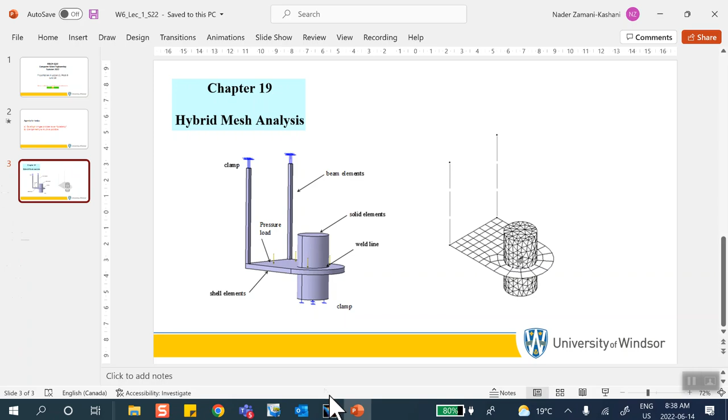What I'm going to do is make only half the model, okay? Single part, half the model. I'm assuming there are no questions. If there are, let me know, please. So I'll go ahead and part.

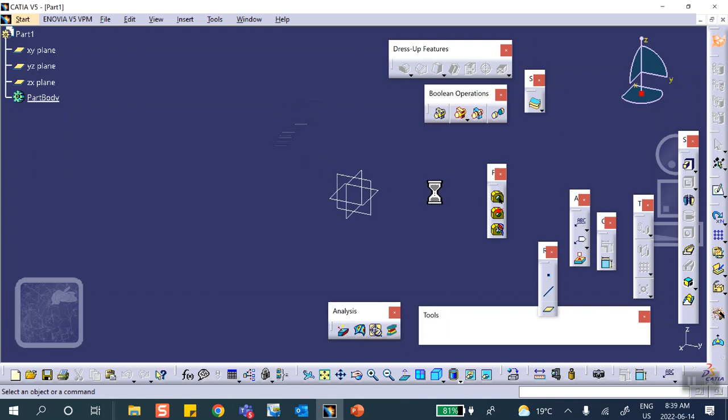I'll just draw half of that arc, okay? Half of that arc, because I'm going to pad half of the cylinder, okay? So let's do the part first, the cylinder first. So I'm going to go to part design. On that face, I will sketch. Not worry about dimensions, but just put something for one of them so that I have a rough idea of what sizes are.

Okay, so this is my half a cylinder, half a circle. Let me just put a dimension here so that — yeah, 2.5, okay, 2.5 inches, radius 2.5 inches.

Now I have to close this, because if you have an open profile like that, or this profile and another line next to it and a point on the same sketch, you won't be able to pad. If you have situations like that, you may want to turn the things you don't need into construction entities.

For example, if you made a point here, and then on this screen you made a point, you can do that here. See, point, line, and it's just hanging there. Then you won't be able to pad this, because it's an open profile. You have to turn those into construction entities.

An open profile can be padded by giving it a thickness, so basically it becomes a sheet metal type thing with a given thickness. If it's open, you can pad it, but not as a regular pad, you have to specify the thickness also. But I'll close it, that's not what I have.

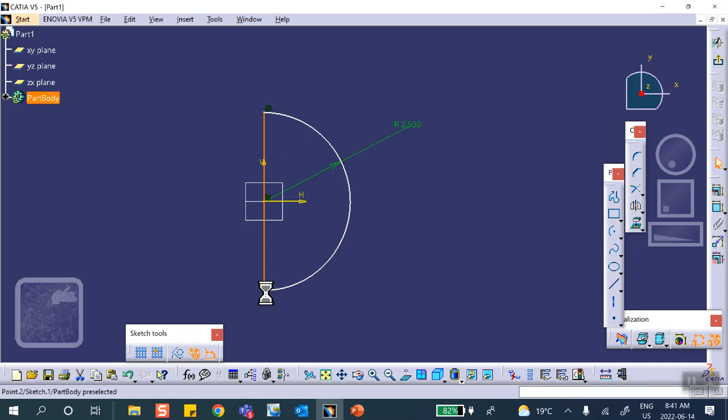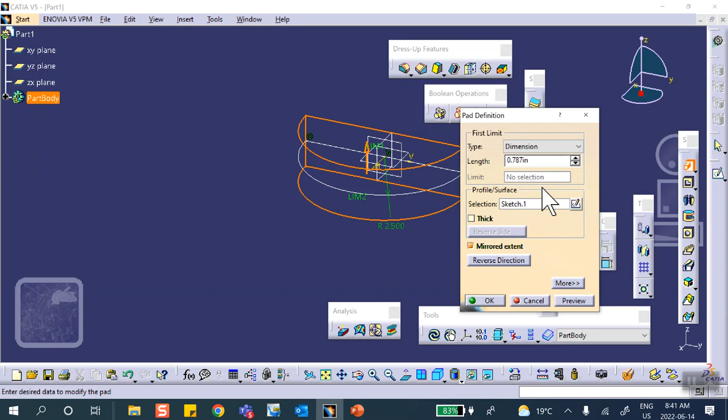All right, exit. Let's pad it by, maybe, 10 inches, 5 inches in each direction. Let's see how it looks. When I say thicken, this is an open profile, you can thicken it, but not this. Mirrored extent, okay.

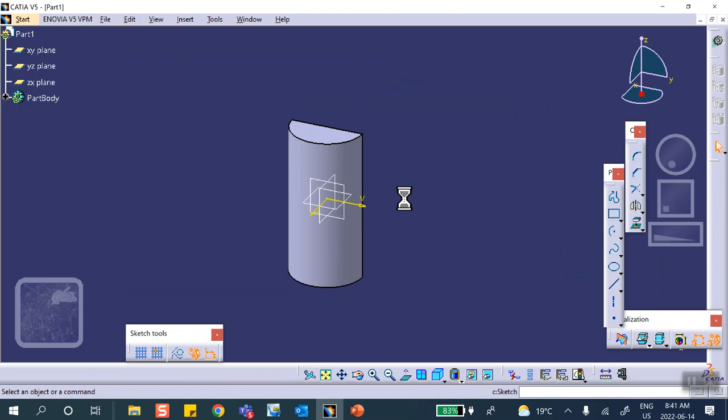So there we are. Then I'm going to create that sheet. Everything is in the same part, so on that same plane I will sketch. I have a choice of doing half of the sheet, which is what I'm going to do, or the whole sheet and then use a split later on to cut it. So something like this.

First, let me project this piece on that sketch. Project this piece on that sketch, because I want to make the rest of it.

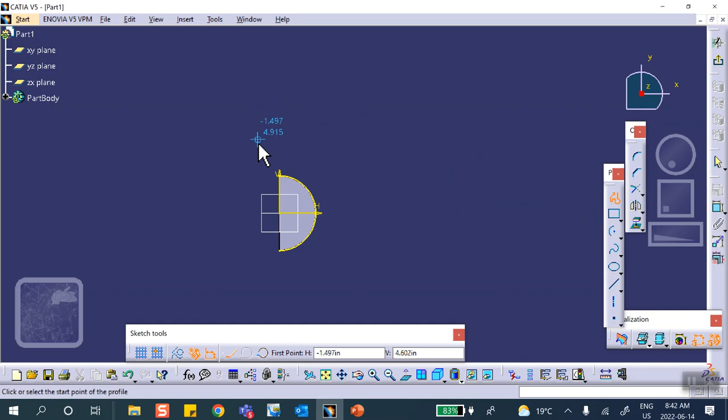Let's see now, the profile. We start here, go up, like that, like this, wrap it up, and if necessary, clean it up.

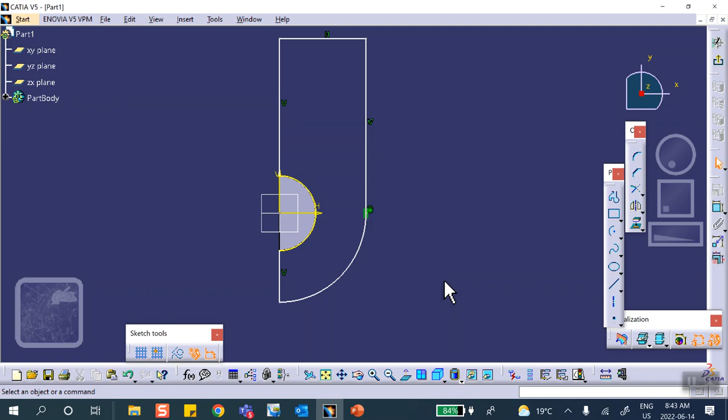If this is not closed, and I'm pretty sure it is closed, but if inadvertently I left a gap between two things, you won't be able to put a surface on it. But I'm pretty sure this is okay. If not, we come back and close it, clean it up.

So exit, and I want to put a surface through this closed path. As soon as you say surface, you have to be in generative shape design and look for fill. There's FILL. Hopefully this is closed, and there we are.

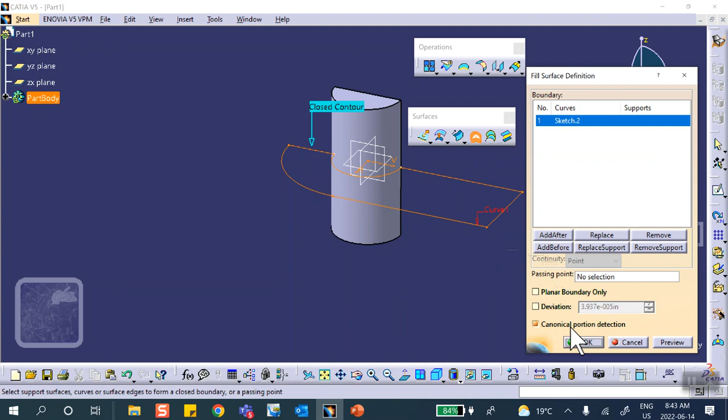And if I hide this, obviously, there it is. So undo that. Do not forget to save.

On Friday it happened, a guy came to me, that group came late anyways. He came to me and said, I didn't save anything. And his computer crashed.

Happens. I think he learned his lesson, but anyway, so file, save management, save as, desktop, new folder, call it 830 part. Parts, okay? A single part, that's what I mean. Say okay. And okay.

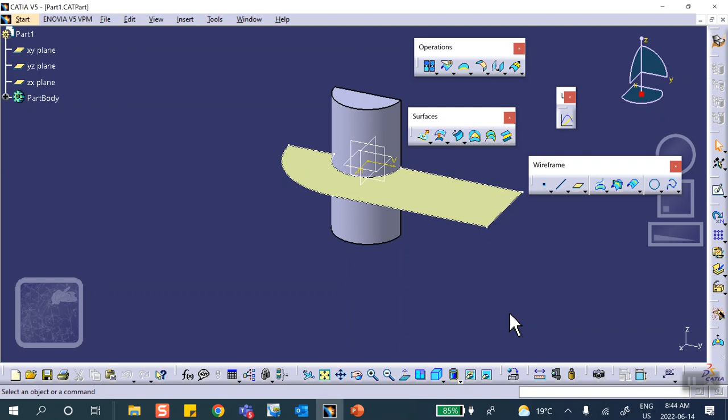Then we're going to do the line. So create a line on this plane in the direction, point and direction, okay? Point and direction, in the direction Z. Let's go by, maybe, 11 inches. See how it looks.

I think we have to change this to 0 also. Let me go up. Oh, there we are.

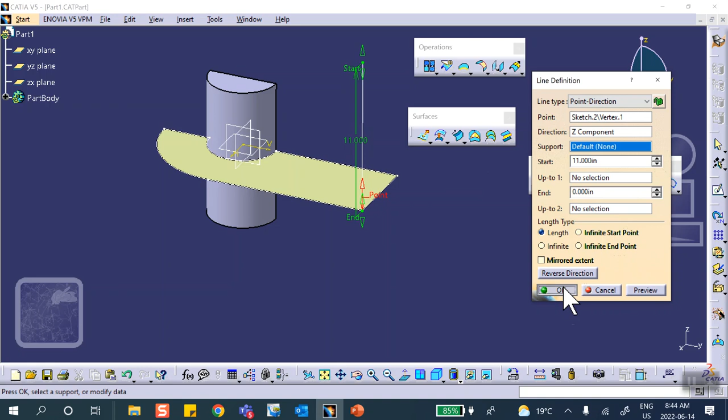Now, once again, it happened on Friday. Somebody said, I can't mesh this, I can't mesh this bar. And I asked them, did you sketch or did you draw a line? Obviously I drew a line here, but she said she sketched it. I asked, what do you have to do when you sketch things? She had no idea it had to be joined. When I told her, she said, really? So, yeah, really. Okay, there we are.

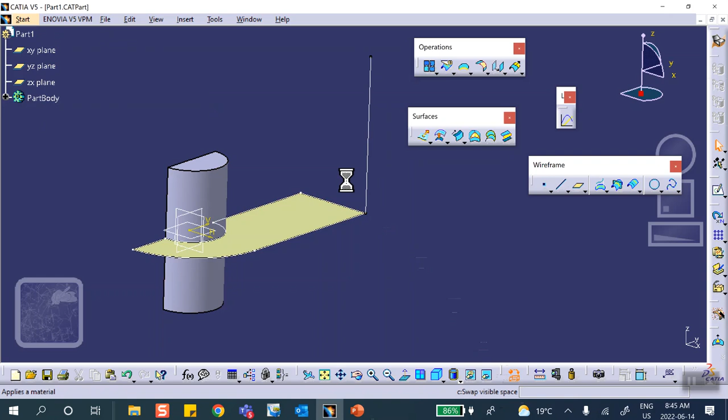And then we're going to save this. But let's put material, it's made of the same material, so aluminum, steel, aluminum, okay. And then save everything. We are good.

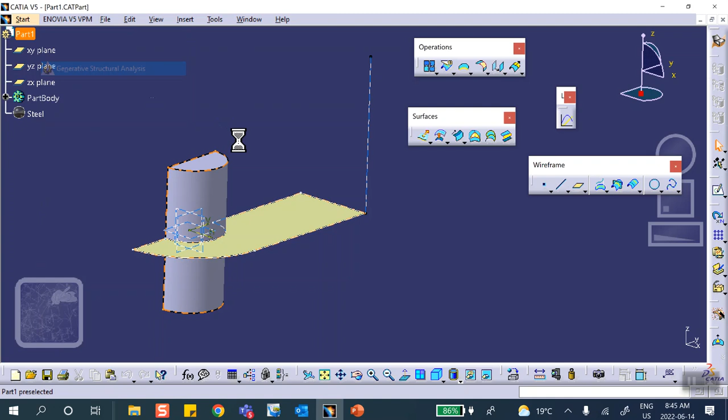Now, right, so now we're going to go to generative structural analysis. Catia immediately meshes that solid for you. And then I have to do the rest.

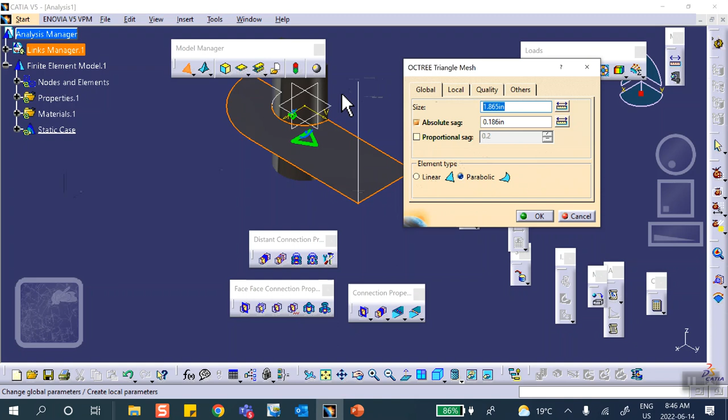Okay, so you go to shell mesh, we mesh this. I'll make it smaller, 0.5. Well, it's parabolic, that's fine. That takes care of this. You put a thickness on it.

It says 0.1, so I'll take 0.1. Then we're going to mesh this guy with beam elements.

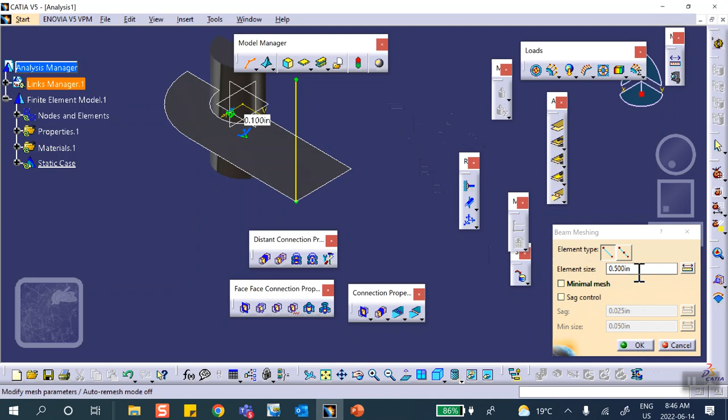Notice that we can mesh it. If this was a sketch, you'd have to join it first before doing this, otherwise you won't be able to mesh it. 0.5, okay, that's about maybe 6 or 7 elements through the length, no problem.

And then we specify the cross section. Let's do it. I think it was a rectangle there. So rectangle, because without it, if it's anything but a tube or a circle, you cannot close this. You cannot say okay. But rectangle, or if it's a circle, you can, but not otherwise.

How about making it 0.1, 0.1? It just happens to be like that. Obviously, I'm going to give you the information if needed.

Notice that I can't close it without using an orientation point. The orientation point cannot be on the curve itself or on its continuation. The reason is that you drop a perpendicular from the point to that line. If the point is on the line, a perpendicular to the line doesn't make sense. So I'm going to select this one.

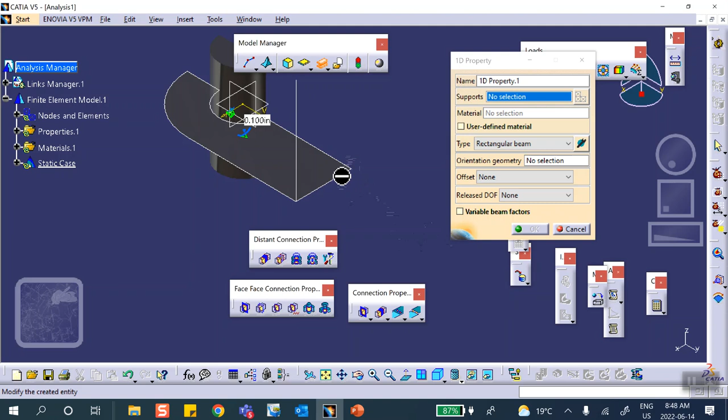Now, if I cannot select that corner, that's because this sketch is blocking my view. So I'm going to hide the sketch. And now, let me cancel that and try it again.

Okay, rectangle, not tubular, rectangle, 0.1, 0.1, 0.1.

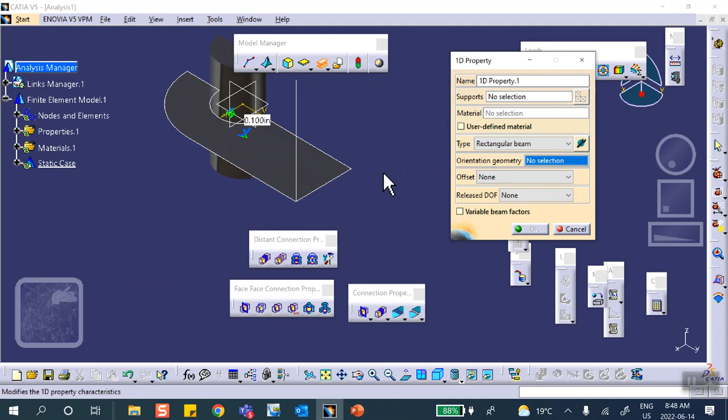Say okay, and I try to pick this, it won't take it. Then I blame that on the sketch, but maybe I have to select the orientation geometry first and then try to pick it. Still, that was the problem. Block this, and now I can select this corner point.

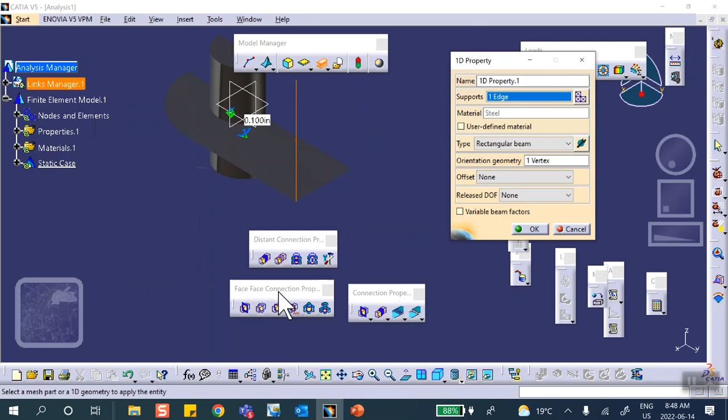Okay, now, oh yeah, the whole support is this. It says, what are you trying to put properties on that line? I forgot to take it.

Now, if you zoom in, you see that actually there's a very tiny little rectangle there, oriented properly. If I had made it 1-on-1, you could see it, but I made it 0.1, so you can't even see it when you're way out there.

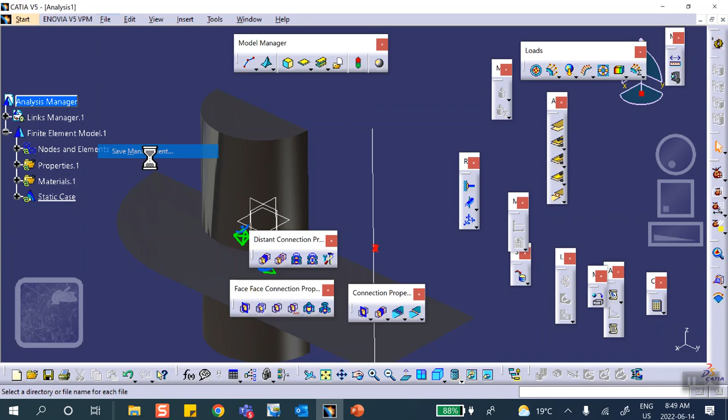Okay, good. So the first thing we're going to do is save our analysis. File, save management, save as, in that same folder. Yeah, that's good. All right.

Now, the top of this is clamped. Make sure that if you happen to have a point up there because of the way you drew that line, you don't take the point and think that you've put a clamp on it and it's going to work. It doesn't. Points, lines, and things like that are not finite element entities.

It has to be a vertex, okay? But I don't have it because I didn't create it like that. I said point and direction, and there's nothing up there. But somebody could have done point to point, created two points, and then connected them with a line. If you do that, make sure you hide that point up there, because if you put the clamp on the point, you'll take it, but you won't see it later on when you run it.

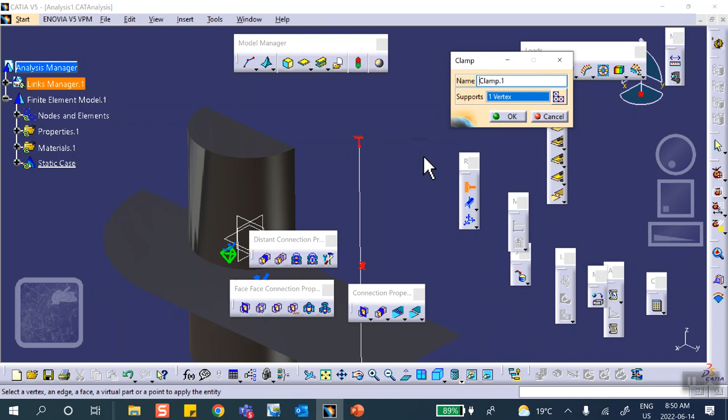Okay, we also have this bottom. In this particular problem, I can lump them in the same one. You don't have to, you can do a different clamp. But there are two things: the top is clamped, you see that, and the bottom is clamped.

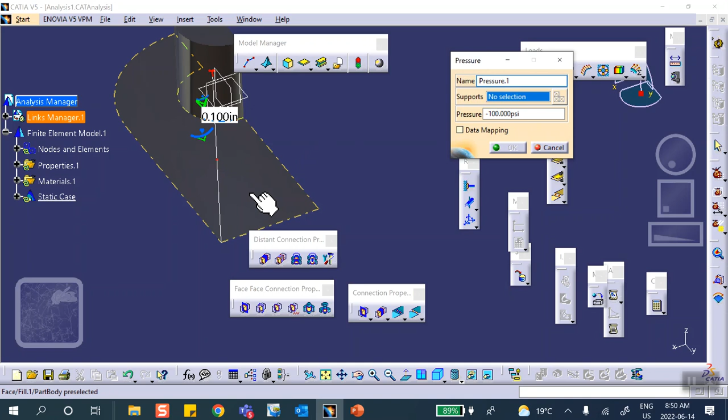Okay, good. Now let's pressurize this. I'll put some pressure. Make sure that the direction is correct. This is correct, pushing down. Okay, that's why I needed this minus sign here.

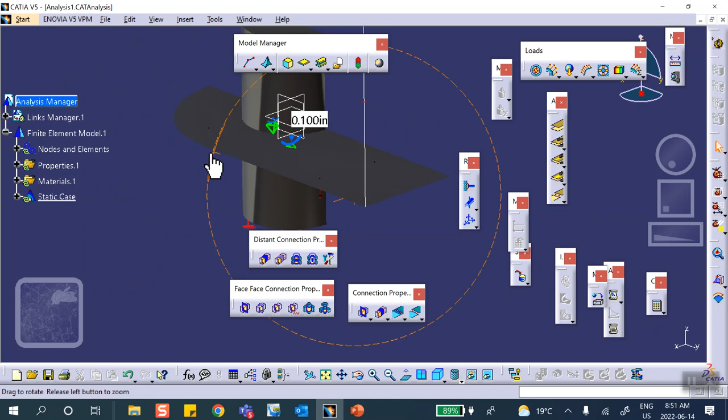Good. And now we create connections between these guys. You have a choice: you can do this surface to that surface as a connection and make it fasten, or you can make the edge of this sheet to that surface a connection and make it fasten. Okay, that's a possibility, it's up to you.

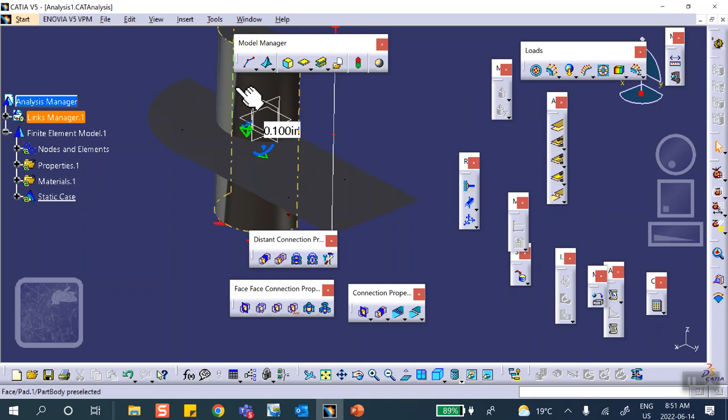Okay, both are acceptable. So let me do this surface to that surface, it's easier, because otherwise I'd have to do something else. There are some differences, no doubt about it, but both, as long as the mesh is okay and everything else is done, will give you very close results.

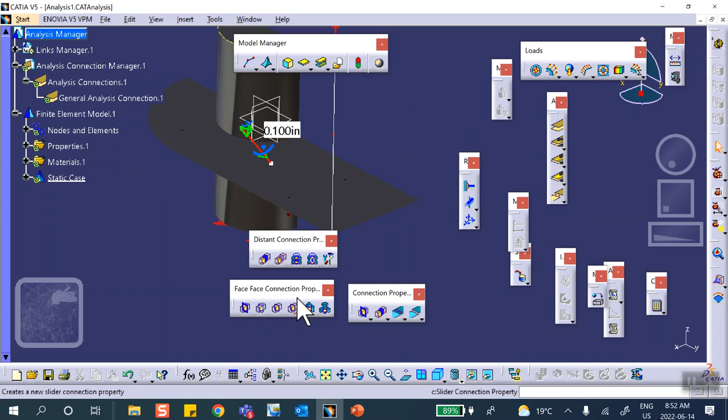So let's see now, connection between this face for the second component, that face, and this is going to be fastened. I think when I did it for you last Thursday, I did edge to surface. All right, so where is the fasten stuff? This is a face-to-face connection. Fasten is over here, and I can select it from there.

And then you have to do point to point, okay, and make it rigid. Now, somebody asked me a question: what if I do this edge to that face and make it fasten? I think it will work. If you do it like that, I have no problem either.

But don't make this with that rigid. If you're doing it rigid, it must be these two points. The reason is that if you make this connection with that and make it rigid, neither one of these will actually change shape. Neither the line will stretch, nor the sheet will stretch. Rigid means rigid. Now we can do it point to point because it doesn't matter, point and point, rigid, okay, fine, no problem.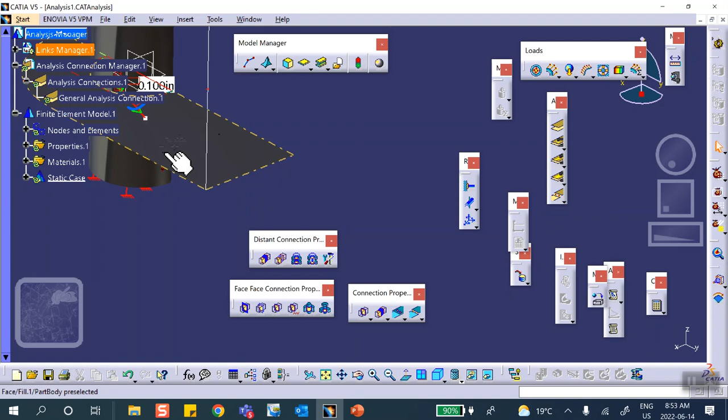But when you do a line to surface and make it rigid, this is going to be rigid, this is going to be rigid, means that these stay put. They don't do anything. And these are things you can try before you take my word.

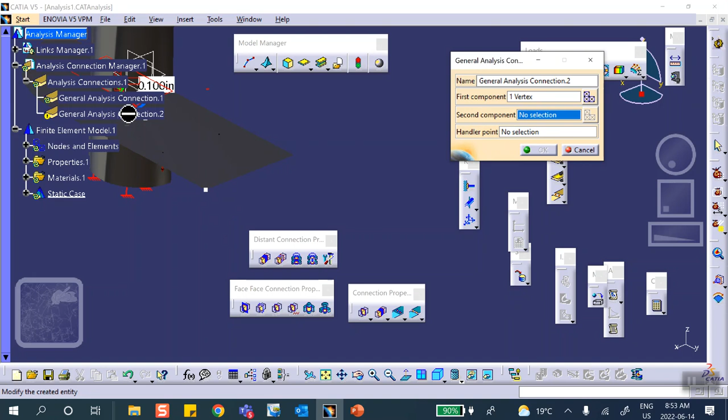Let me do point to point connection. We hide this between this point, and let me bring this thing there, and hide that guy. I'm trying to take this point. If I cannot take it, that's because I'm trying to make that connection and put a dot there. So hide it, just hide it. There. And this is going to be rigid.

Now, where's that connection? That last one? Good. Run it, run it. What do I have to do? Yeah, symmetry restraints, symmetry restraints.

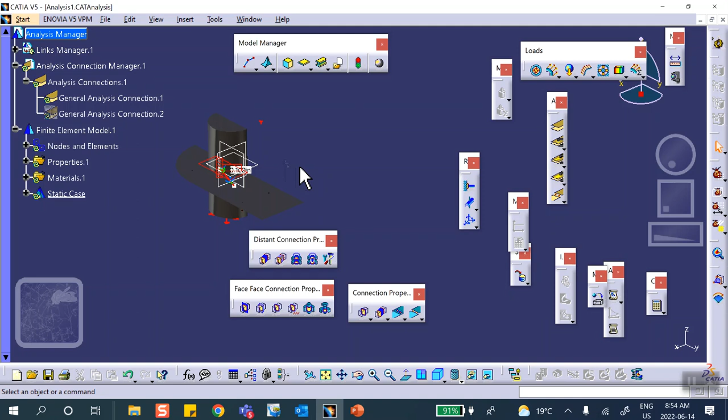Okay, so let's do on this guy surface slider. And if you don't like surface slider, all that does is that perpendicular to that direction, there's no displacement. So that direction is X in my case. So you say no displacement in X. You can do that, it's the same thing.

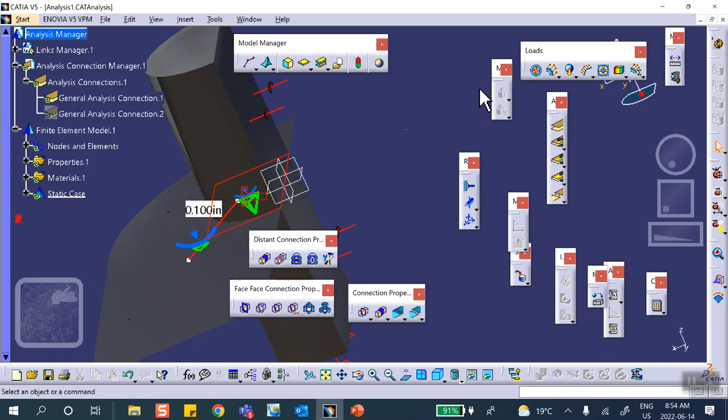And the shell. These two pieces are critical for full mark. Okay, so we do surface to point restraint, uncheck all of these. That's a good strategy, to uncheck them.

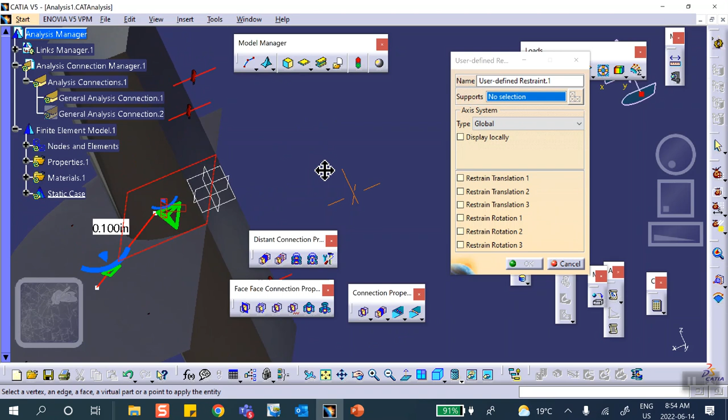This edge and that edge, these are on the plane of symmetry, YZ plane of symmetry. As soon as I say YZ plane of symmetry, no X. No X. And once you get the translation, these are exactly the opposite. Notice that that circle, half a circle, is not on the plane of symmetry, obviously. It's just these two edges that are on the plane of symmetry.

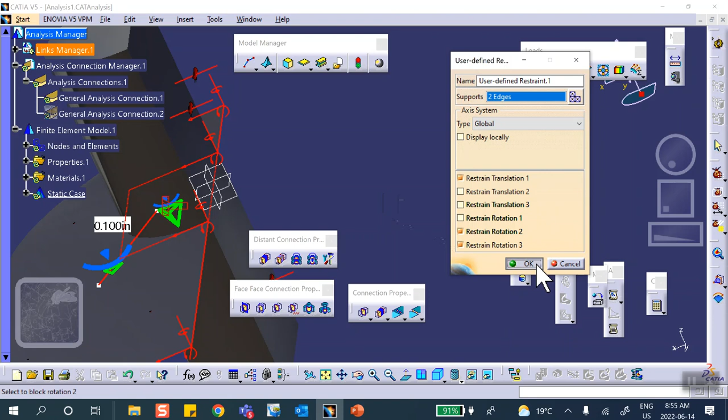And we say, okay, let's save everything and run it. Now, it happened to quite a few people on Friday, maybe 20 or so, that they did everything right. Everything was right, but when they tried to run it, it did not. It gave this weird message.

I don't know what it says. You don't know what most of these things say. Which, in some cases, we tracked it down. We sat there five minutes with the guy and sorted out what the issue was. There can be many different things, going to the tree one by one, checking it. But then we reached the point that everything was right, but it would not run.

Now, he didn't tell me, of course, what he had done before that. You know, you go and play with your phone and things like that, and after a while you press everything and nothing works. So what do you do? You reset it, usually it goes back. Unfortunately, at that point, you have no recourse.

You have to scrap that analysis because you can't figure out what's wrong. I can't figure out what's wrong. You did everything right, but it won't run. And that is the difference, I told them, between 35% or the full percent, on whether it runs or not. So if you decided to manage your time so that you don't have to do things like this in anticipation of something being scrapped, well, that's your problem. It's not CATIA's problem, it's not my problem, because we don't know what this guy did.

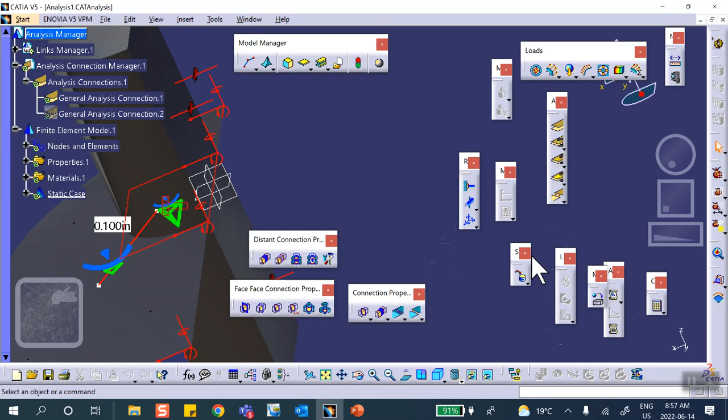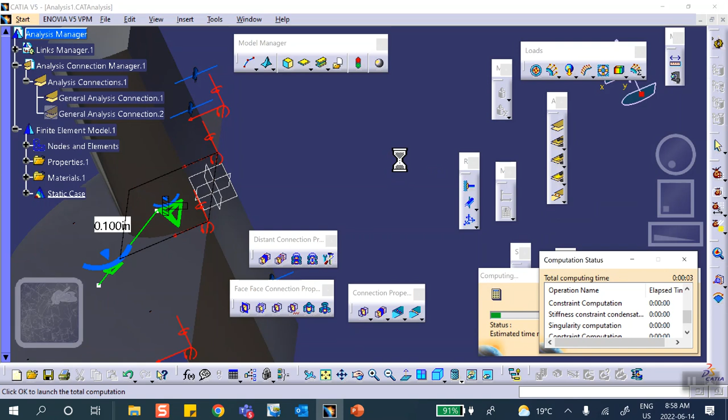This is the common message that we get. I don't know, maybe you guys don't get it, but I do.

All right, it did run. Let's look at the deformation. First thing we do is look at the deformation to see whether this whole thing makes sense or not. Yeah, it does make sense, right?

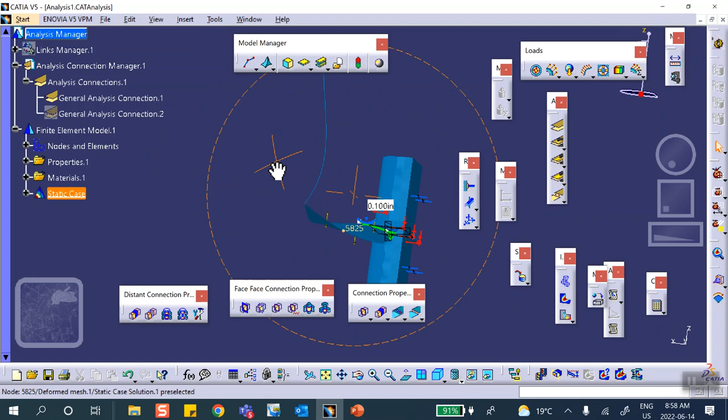Let me change the rendering here to the third one. You can see your elements, okay? There's all these crazy things that you see there. These are internal elements for that fasten connection or contact connection that you created, okay? And because I made surface to surface, remember I made surface to surface fasten? If somebody does edge to surface, it's going to look different. I don't know internally how they wrote the code for these internal elements, but even though it may be exactly the same mesh, we've done exactly the same thing, the difference is in that connection, edge to surface or surface to surface. The shape of those things will look different, okay?

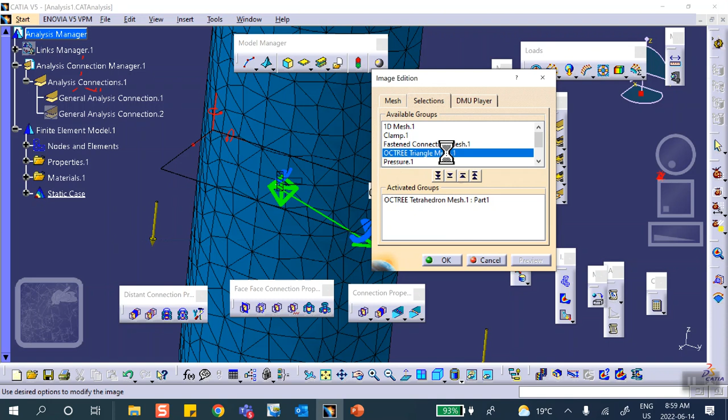Now if we don't want to see these, and really we shouldn't look at it because these are totally useless for us, we can say just show me, don't show me everything. Just show me, for example, part 1, the mesh, shell mesh, and the beam mesh, which is, where is it? Right here. Don't show me all that garbage. That garbage is important, but not for us. Internally, it uses the stuff, those elements.

And I'm not going to do the rest of it, deflection, you can see, and von Mises stress, etc. Okay, any questions here?

All right, so let me save this because I want to minimize the amount of work that I'm going to be doing, okay? So what do I mean by that?

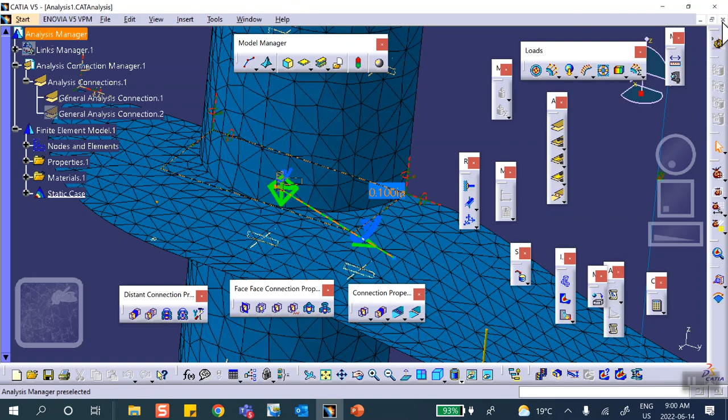What I'm going to do is close this, and close that. So I have a folder here called 830 right there. This is where I put my stuff. Oh God, okay, I have to create the parts separately now. Unfortunately, I thought for some reason... yeah, don't worry about what I said. Let's do another one. We have no other choice. Okay, so let's go there.

Product, okay, immediately save it. File, save management, save as, up, desktop, where is that? Desktop, new folder, 830, assembly. Assembly, there, we say okay, and we say okay, there.

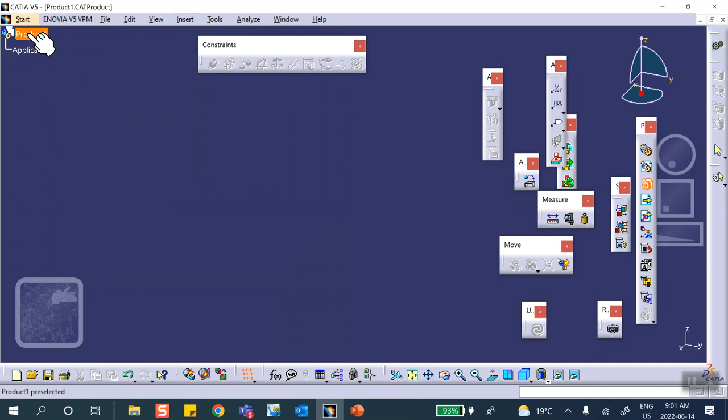So once again, I can make half of it or the whole thing. I'll make half of it. So, insert new part in there, and I'm going to call this cylinder. Properties, cylinder. Did I do that? Cylinder. Maybe I have to go down. Oh, there, part, this is the one, cylinder.

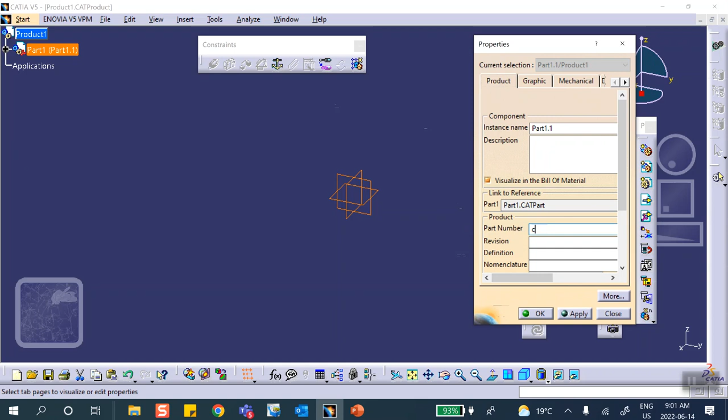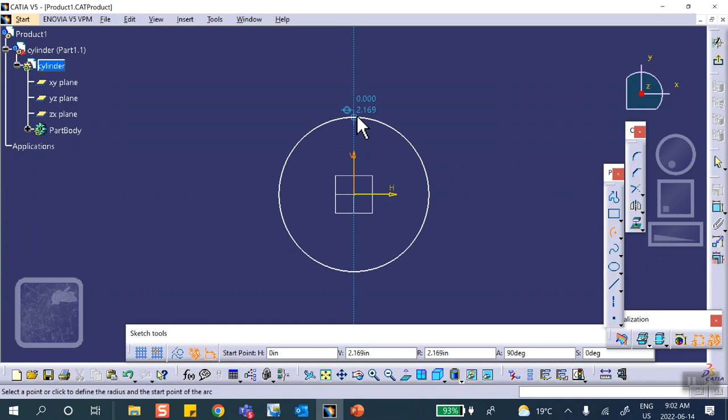Okay, let's make it. Double click on that same plane. I will sketch the same half a circle. Let me give it... I'm not going to even bother about dimensions. Maybe I should, 2.5, and close it up. A line. Lousy.

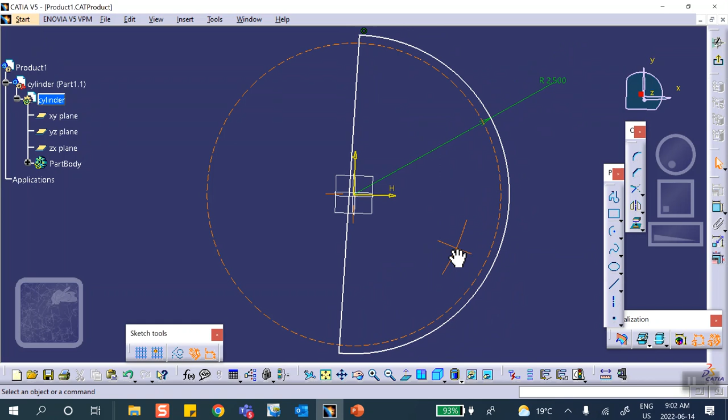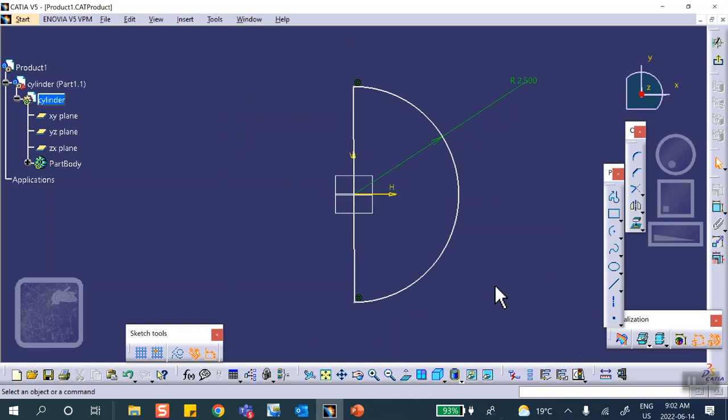And the reason is that this point, I wanted it to be on that line. I was sloppy in doing it, so let me clear it up. This point, control that axis. Coincident? Okay, all right, there's the normal view. You know, little things like that can make or break your problem. Because if you cannot fix this, this is the first step. If you cannot do something like that, it is a problem. You may be better off getting rid of the sketch and doing another one.

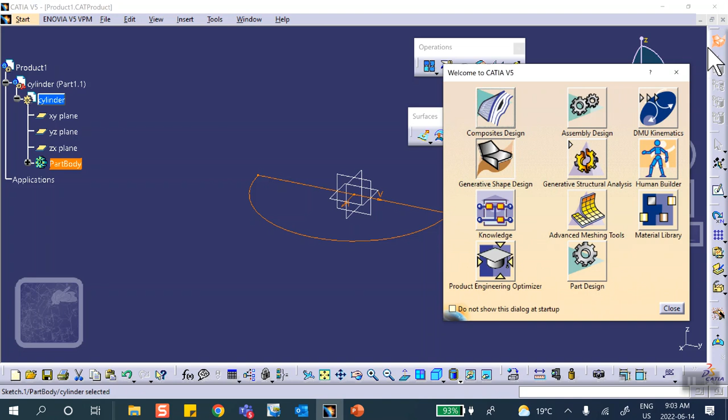All right, exit. We have to be in part design, so we go to part design, and we're going to pad it 5 up, 5 down. 5 up, mirror extent, 5 down.

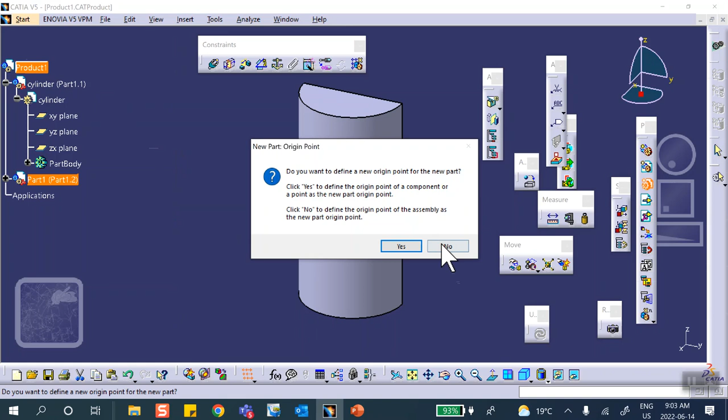Good, we're done here. So we go to product, insert the second part, which is going to be that sheet. So insert, new part. I'm going to call this thing the plate. Right click, properties, plate. I'll do this one, plate.

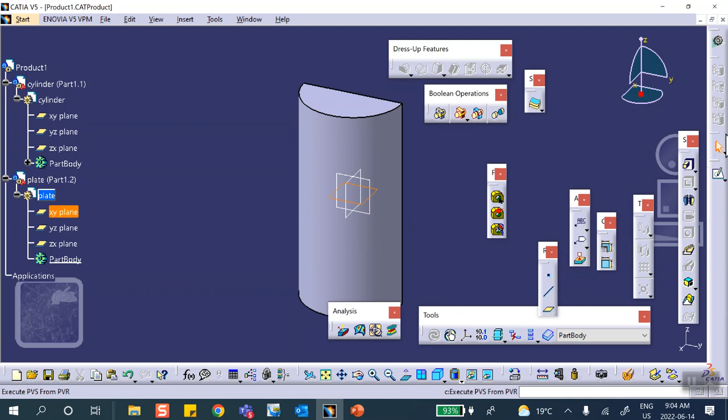And make it exactly the same strategy. First you go to the plate, and on that same plane, you sketch and project that same thing. Or if you don't like project, go draw it. Okay, and complete the rest of this, just like we did before. I may have to clean these up, I don't know.

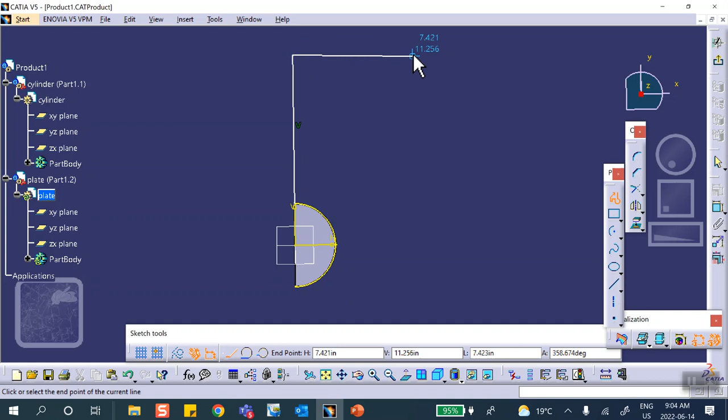I don't like this, but anyway, we'll see. It could be that because I'm not looking at it from the exact normal direction. Look at this one, we make it horizontal. Still there's a... yeah, that looks good. We'll see. So, exit.

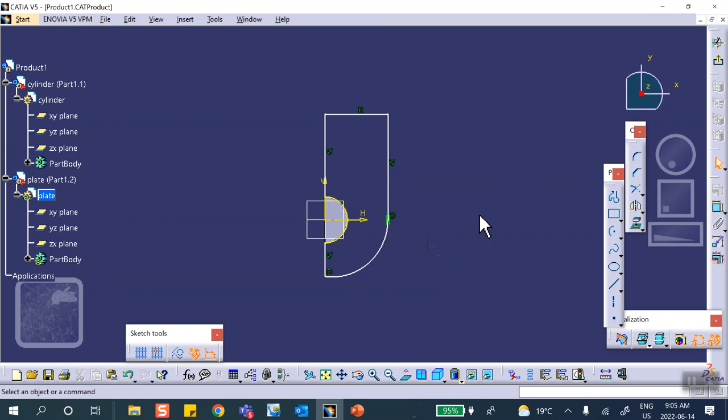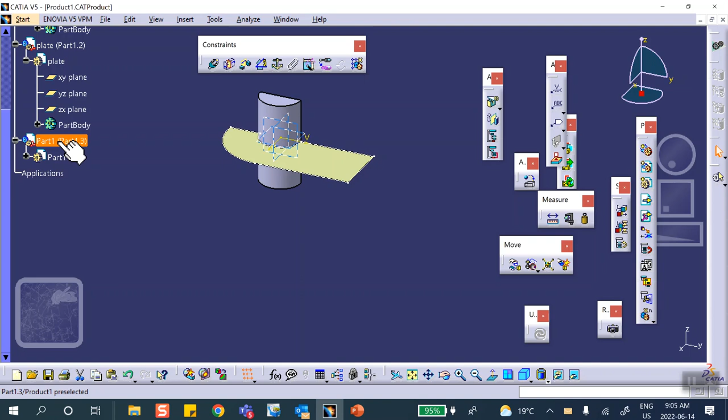We go to the generative shape design. Fill this, F-I-L-L. That looks okay. And then go there, product, insert our third part. Insert new part in there, and I'll call it support or cable. Right click properties. I'll call it support. How about that?

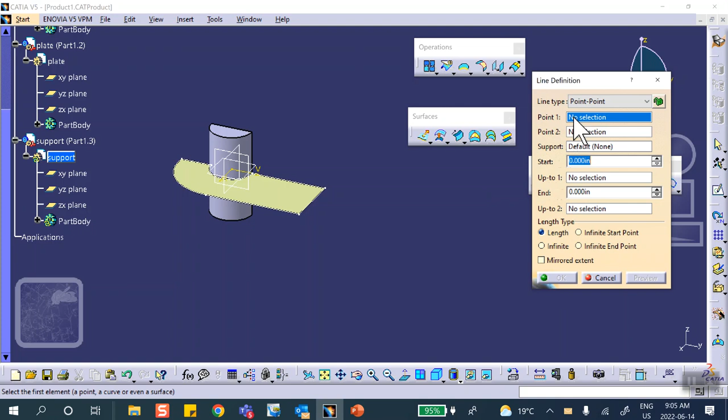Okay, let's make it. So I go to the support. I have to draw a line. There we are. Point and direction. The point is right here. Direction is Z. And this is 0. Let's put a 5 here. Maybe 10.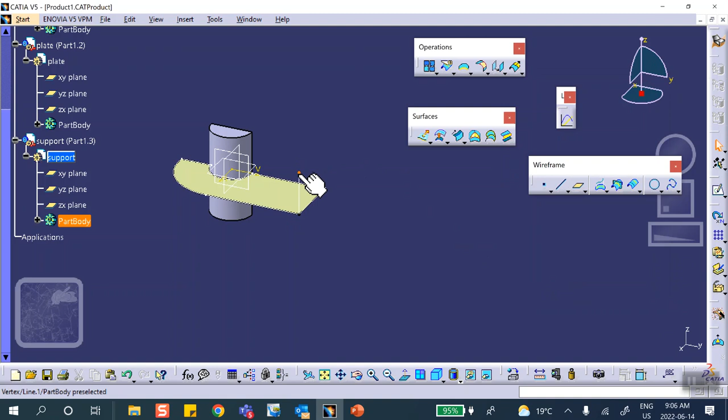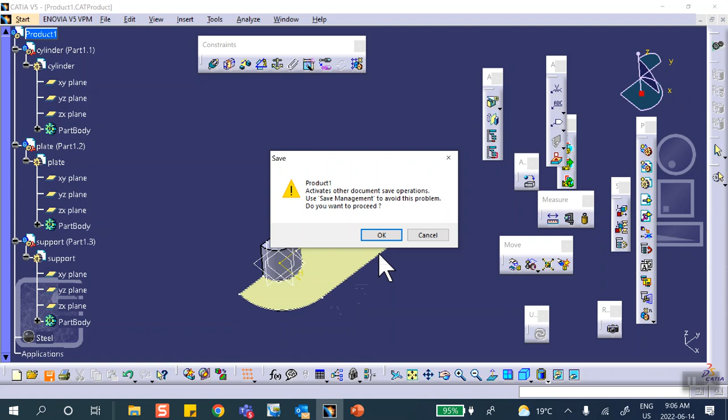Okay, at the end of the day, you have to have something like this, whether it's in a single part or an assembly. Well, I did a single part for you. You go up there and you put properties of steel on it. Properties, steel on that product. Immediately save it. We already saved our product. All we have to do is to click on the floppy and it saves the stuff that we did since then. That's pretty much it.

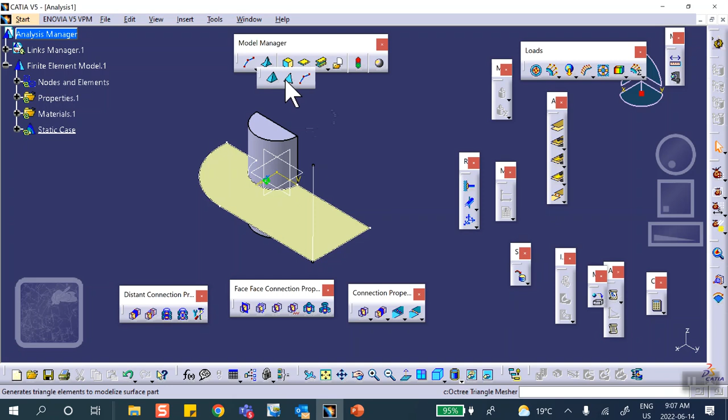So now we're going to go to generative structural analysis. Okay, so it's already meshed this. So let's do a shell mesh for that surface. Make it smaller. Okay, put a thickness on it. Let's mesh the beam. Rectangular dimension is the same because I didn't change it since then.

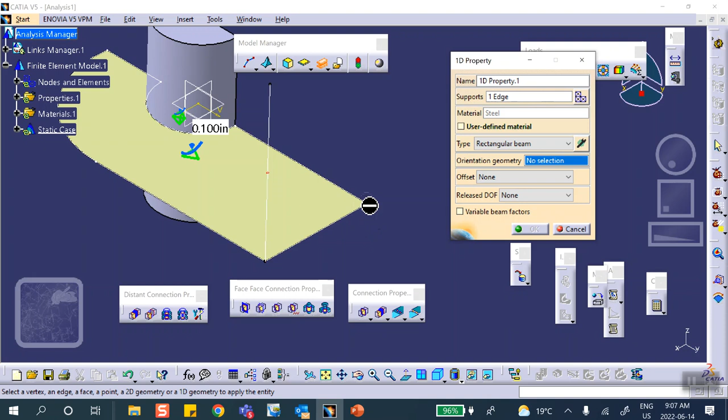I'm going to select support. And for the orientation point, I will select this. If it doesn't let me pick it, it's because of the sketch. Hide it. And then select that. Okay, that's pretty much it. Connections.

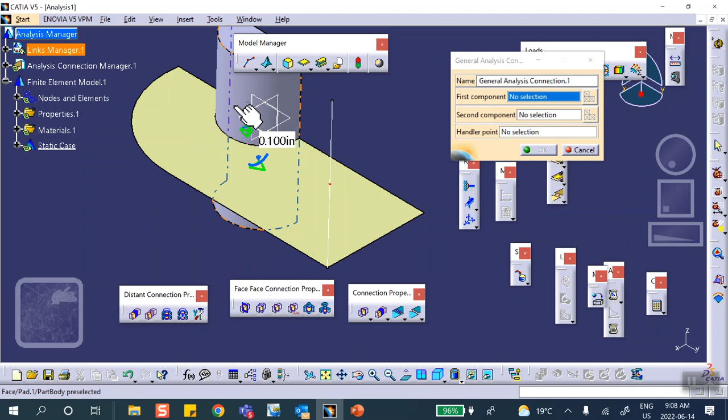This time I'll do edge to edge. How about that? I'll do edge to edge. So you don't have to. Not edge to edge, edge to surface. Okay, so this is the first component. Second component, I'm going to hide that. I'm going to select this, and I get that, and this is going to be fastened - meaning purely perfectly bonded, perfectly or welded, stuff like that. That's really what I mean by fasten.

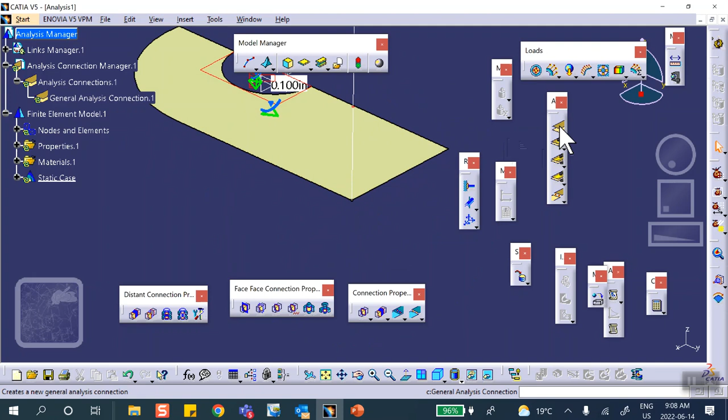So fasten connection on this connection that I created, which is right here, right there, you say okay. And for this guy, I have to do point-to-point connection. You know what? Let me try the line and the surface and make it fasten. Don't make it rigid, because rigid means they're not going to change. Let's see if it works. So the line, second component, that surface, and then fasten.

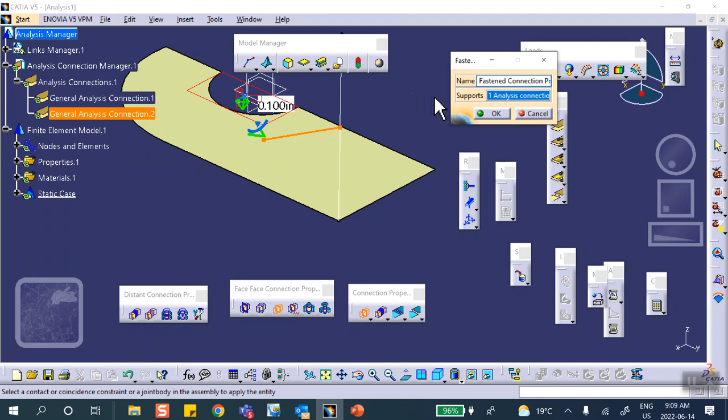Now what? Must be a fastener somewhere. Did it do it? It didn't put a fastener sign, and I don't honestly like it. We're going to find out. We may have to come back and do it point-to-point rigid. We'll see. So let's do the restraints.

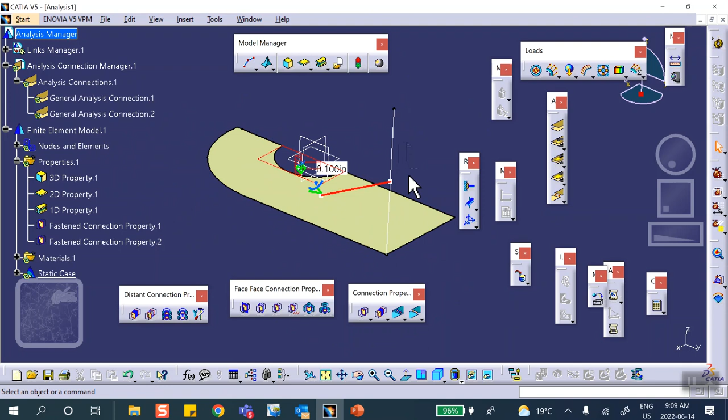Surface slider here. User-defined restraint. And because I did the same coordinate system, everything, so all I have to do is select this edge and that edge, because everything here is correct. It was the same setup that I had before.

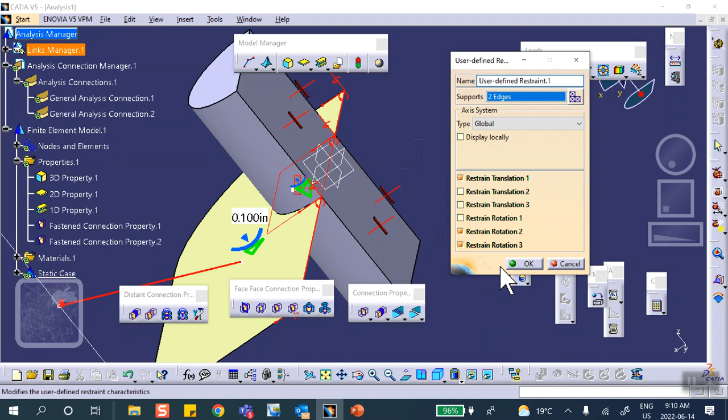And for clamp, the bottom of this is clamp. And I'll make this top, and put a pressure there.

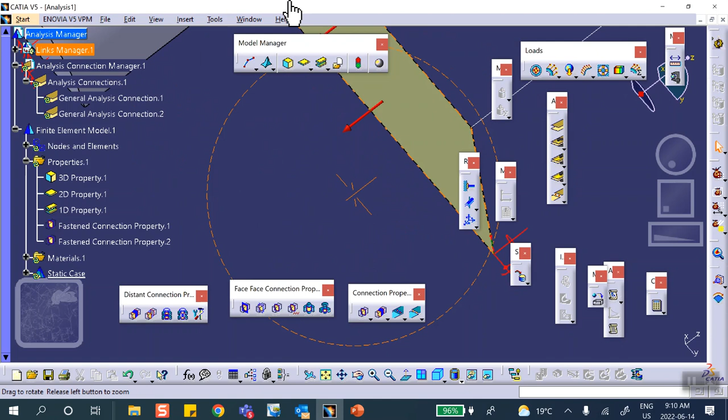The direction is correct. Okay, I'm going to run it, but I'm not very, very optimistic, because I would have thought that it works, but if it did, then where is that second fastener sign? I don't see it, so I don't like it.

Let's save the analysis first. File, save management, analysis. Don't do any, don't give us all these temporary files. Where are they? Oh, I haven't run it there. There are no temporary files yet. Okay, these are the part files, the 3 part files, and product and the analysis.

So save as. Once you run it, there's going to be 2 extra files which are temporary files. We don't want it, don't give it to us, don't upload it, you don't have to. Folder 830 assembly. Good.

Okay, let's run it. We'll find out whether this fasten thingy works. But I'm surprised that I don't see a fastener sign there. Maybe they're sitting on top of each other. I don't know.

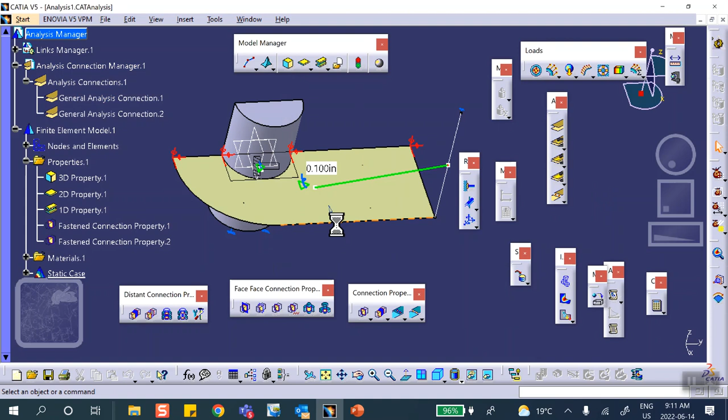Yeah, it looks like it works. I could have done point to point, rigid, line to surface, fasten - different. Any one of these would be acceptable for me. For real life, then you have to be very careful. In other words, what is going on?

One of the things that you cannot do it like this is that this was a cable. If this was a cable, you cannot prevent that cable from bending anymore. Because when you do it point-to-point rigid, then you can go and release the degrees of freedom, okay? Release the degrees of - so be careful. If I said these are cables, this is not going to do it. You have to do it point-to-point, rigid, and release the corresponding rotational degrees.